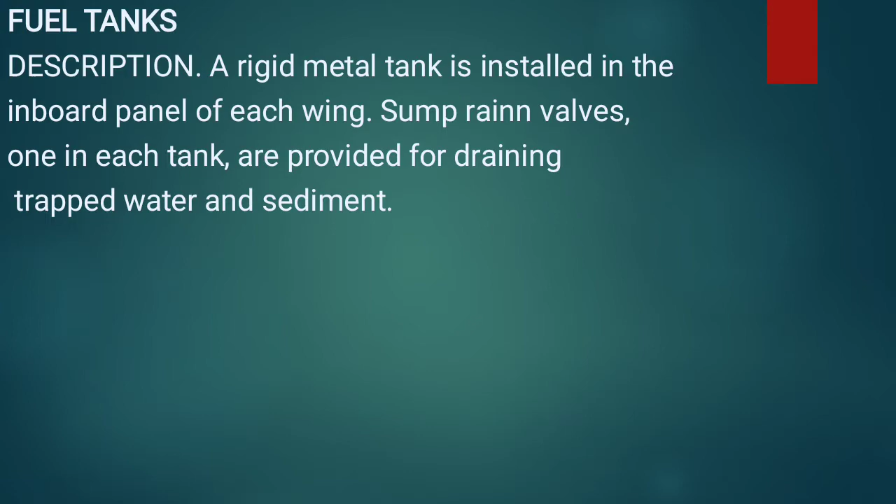Fuel tanks. Description: a rigid metal tank is installed in the inboard panel of each wing. Sump drain valves, one in each tank, are provided for draining trapped water and sediment.

Removal and installation. A. Remove sump drain valve and drain fuel from applicable tank. B. Remove fuel tank cover by removing attaching screws. C. Remove wing root fairings. D. Disconnect and plug or cap all fuel and vent lines from tank. Remove fitting as necessary for clearance when removing tank.

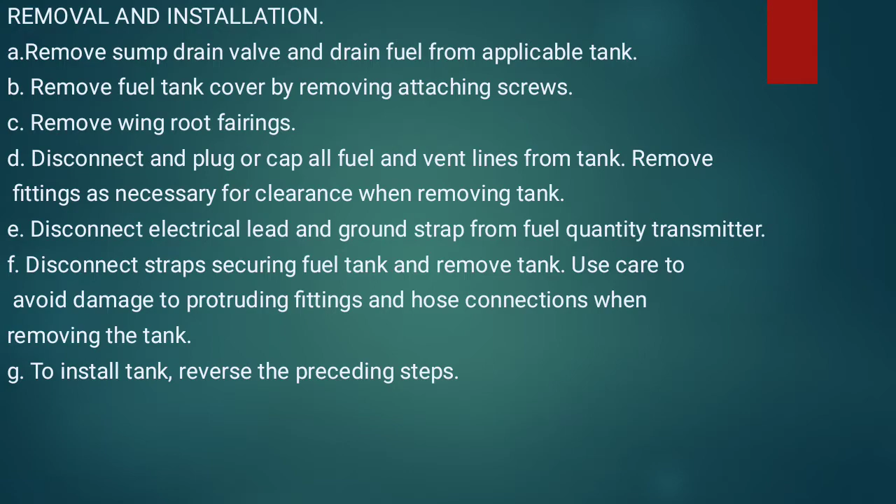E. Disconnect electrical lead and ground strap from fuel quantity transmitter. F. Disconnect strap securing fuel tank and remove tank. Use care to avoid damage to protruding fittings and hose connections when removing the tanks. G. To install tank, reverse the preceding steps.

Fuel quantity transmitters. Fuel quantity transmitters are installed in the top of fuel tanks. A complete description along with procedure for removal

Fuel vents. Description: a vent line is installed in the outboard end of the left fuel tank and extends overboard down through the lower wing skin. The inboard end of the vent line extends into the fuel tanks, then forward and slightly upward.

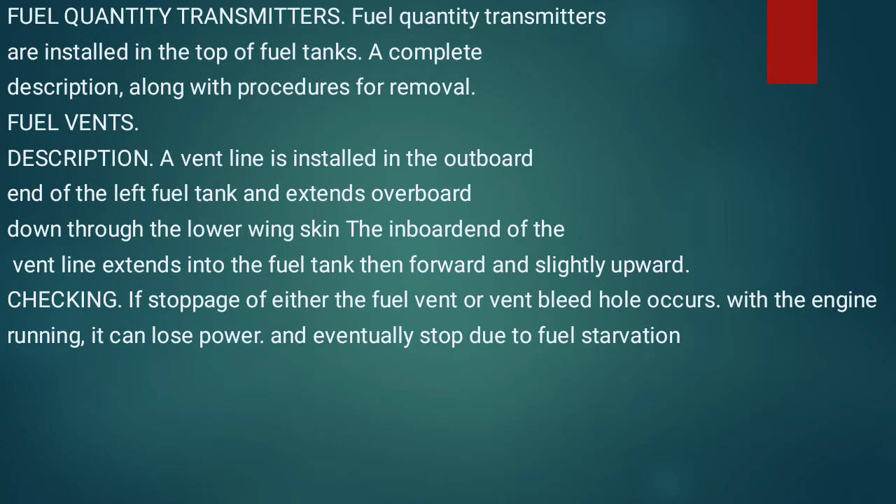Checking: if stoppage of either the fuel vent or vent bleed hole occurs with the engine running, it can lose power and eventually stop due to fuel starvation.

Fuel selector valve description: a 4-position fuel selector valve is located beneath the floorboard just aft and slightly to the left of the pedestal structure. A shaft links the valve to a handle mounted on the pedestal structure. Removal and installation. See figure 12-2.

A. Drain all fuel from wing tanks, fuel strainer, lines, and selector valve. B. Remove selector valve handle 11 and pedestal cover. C. Peel back carpet as required to gain access to inspection plates aft of pedestal structure.

D. Disconnect lower universal joint 14 at valve shaft. E. Disconnect and cap inlet and outlet fuel lines to valve. F. Remove screws 21 attaching valve to mounting brackets 13 and remove valve.

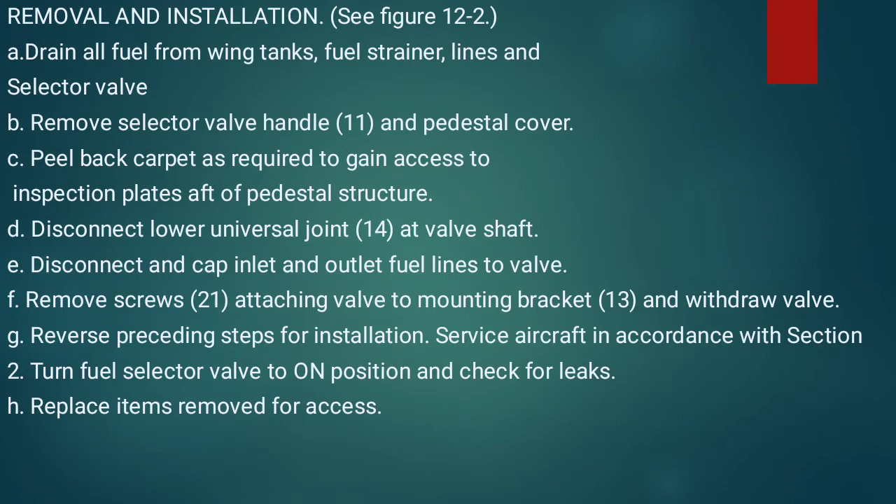Fuel strainer description: the fuel strainer is mounted at the firewall in the lower engine compartment. The strainer is equipped with a quick drain valve which provides a means of draining trapped water and sediment from the fuel system. Note: the fuel strainer can be disassembled, cleaned, and reassembled without removing the assembly from the aircraft.

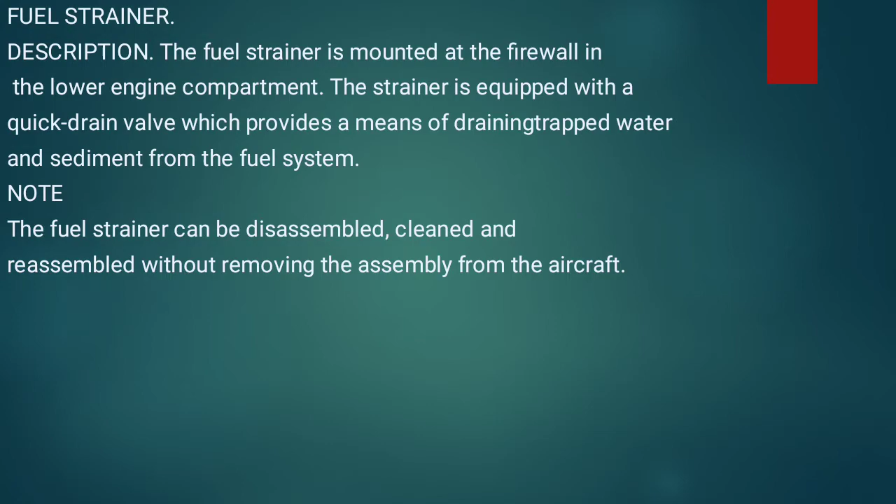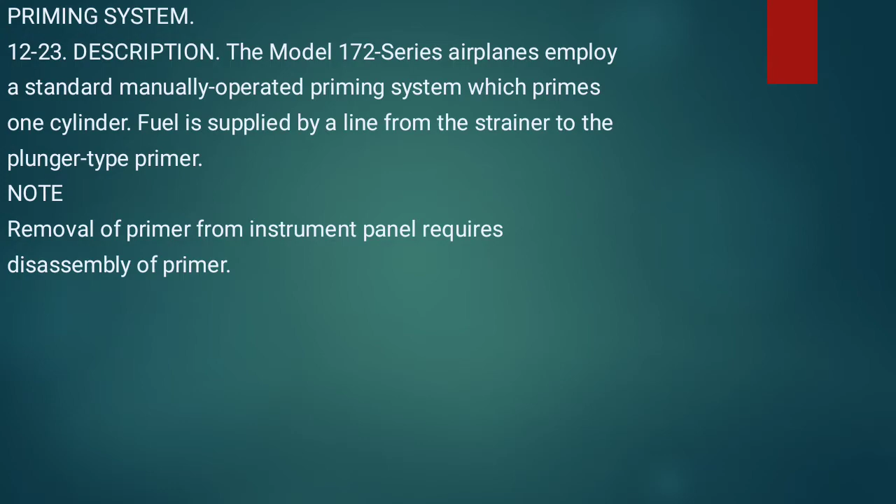Priming system 12-23 description: the model 172 series airplanes employ a standard manually operated priming system which primes 1 cylinder. Fuel is supplied by a line from the strainer to the plunger type primer. Note: removal of primer from instrument panel requires disassembly of primer.

Auxiliary electric fuel pump description: the electric fuel pump is located under the floorboards on the right side of the cabin. It is plumbed into the fuel system parallel with the engine-driven fuel pump. The auxiliary electric fuel pump may be used as a standby in case of engine-driven fuel pump failure.

Sealing during and after structural repair. Any repair that breaks the fuel bay seal will necessitate resealing of the area of the bay. Repair parts that need sealing must be installed and riveted during the sealing operation.

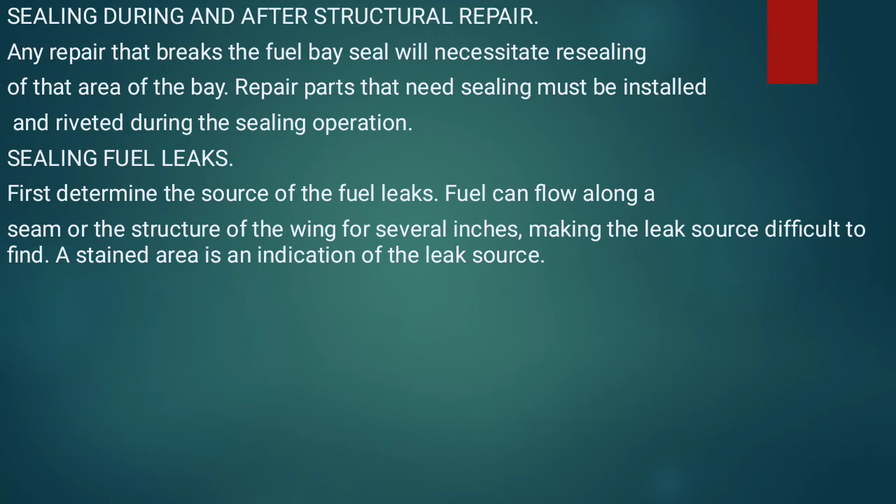Inspection, cleaning and repair. A. Remove right hand fuel filler cap from the adapter assembly. B. Disconnect the safety chain from the cap and cover or plug the tank opening to prevent foreign matter. C. Check condition of gasket and frictionless washer.

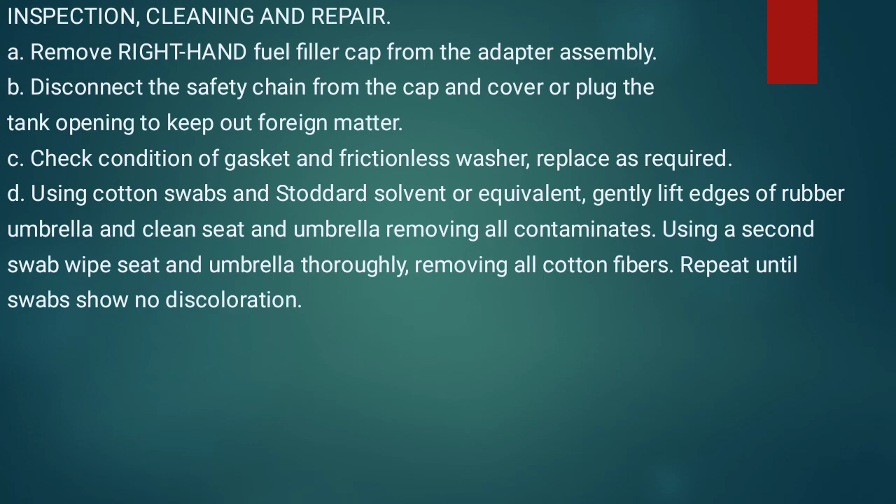Replace as required. D. Using cotton swabs and Stoddard solvent or equivalent, gently lift edge of rubber umbrella and clean seat and umbrella, removing all contaminants. Using a second swab, wipe seat and umbrella thoroughly, removing all cotton fibers. Repeat until swabs show no discoloration.

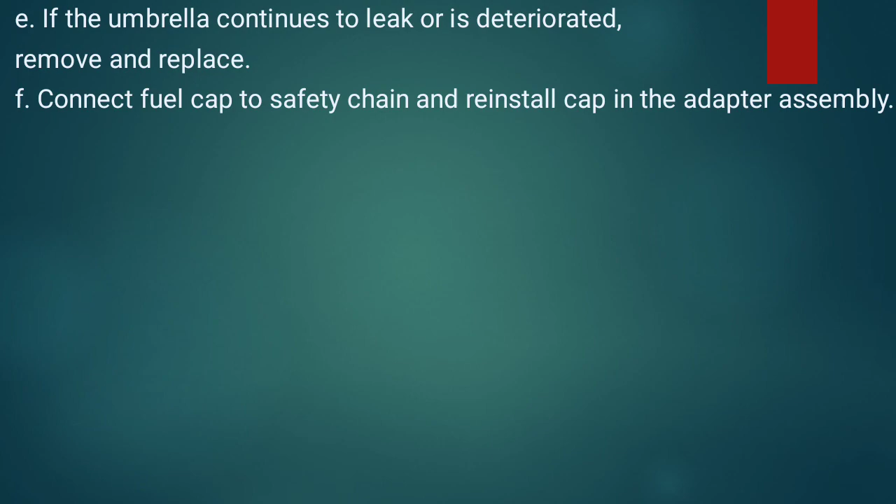If the umbrella continues to leak or is deteriorated, remove and replace. F. Connect fuel cap to safety chain and reinstall cap in the adapter assembly.